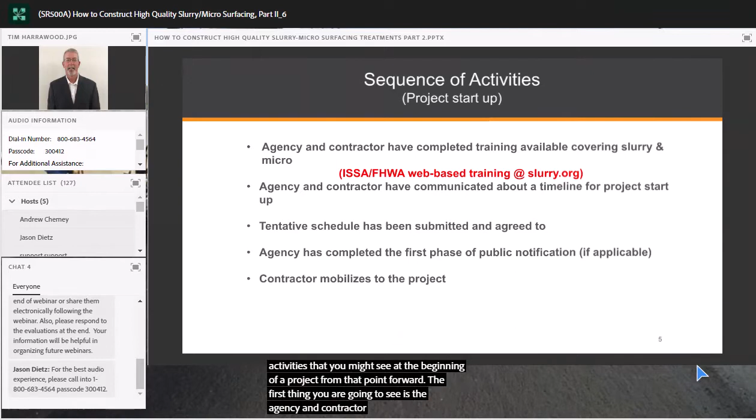The first thing you'll see is the agency and contractor completing available training covering slurry seal and microsurfacing. I put the link to where you can find that web-based training. As far as slurry and micro goes, there's a little over 6 hours worth of training offered free from FHWA and ISSA.

It's great information for just-in-time training, and it's really designed to help those with limited familiarity with the treatments become familiar with them before they have to perform oversight, or from the contracting side before they have to place the treatment themselves.

The agency and the contractor have communicated about a timeline for the project startup and talked about schedules. Those schedules have been submitted and agreed to, which means the agency has completed or put forth some effort to complete the first phase of public notification, if applicable.

We talked about that extensively in part one. It's great to have a three-pronged approach to notifying those who are going to be affected by this project. The more informed the traveling public is, the better off everybody is as a direct result.

After that, the contractor mobilizes to the project. What do we do next? The contractor sets up the staging areas, screening plants, emulsion tanks, and all the auxiliary equipment, and does general organization.

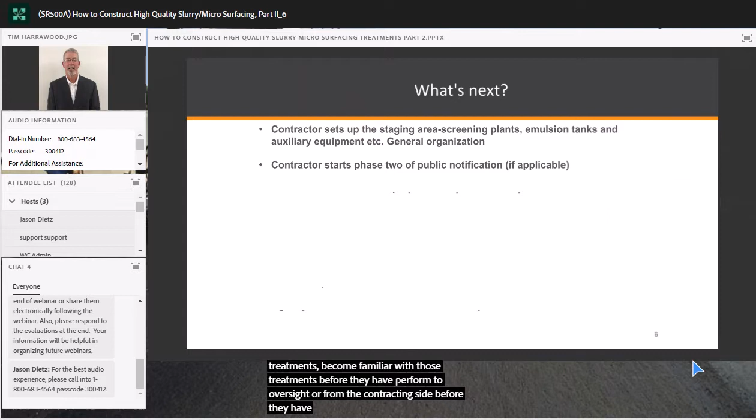While they're doing that, they'll have a crew out starting phase 2 of public notification, if applicable.

The contractor will start final surface preparation operations on the pavement to be treated. All the preliminary, or first phase, of surface preparation has already taken place - any patching, crack sealing, curb repairs, that's well behind us, and now we're just doing final sweeping, cleaning, maybe a little herbicide removal, things of that nature.

Then one of the most important things the contractor is going to do prior to starting the job is calibrate the application equipment in the presence of the agency representative. It's extremely important that the agency participate in the oversight of this calibration.

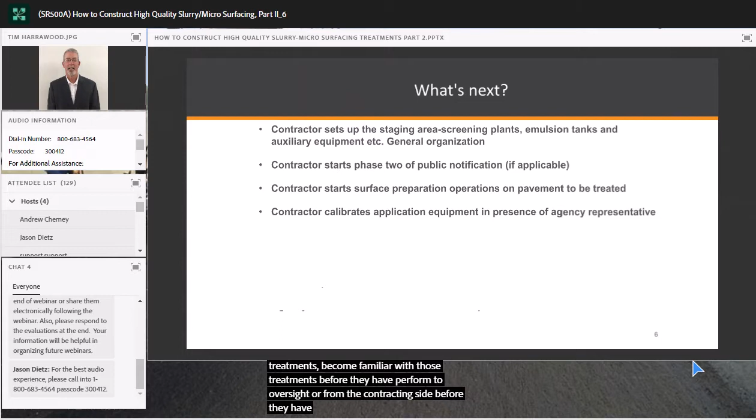Not only does it give them some familiarity with the equipment and how the component materials are blended together in the necessary proportions, it just lets them know how the equipment works. It's not something they typically see, and in about 2 hours watching a calibration, they can learn an enormous amount of information that will make them more comfortable with the operation.

Upon completion of the calibration, the contractor sets up the machine to produce a mix that matches the job mix formula, which we'll talk about here in just a minute.

The contractor then performs a test strip, which should be part of the project and in similar project conditions. We'll talk more about that as we get farther into the presentation. Then the agency and contractor evaluate that test strip after it's put into place. If acceptable, the contractor proceeds with treatment installation and major project production.

We talked about calibration and how important it is, and I really cannot emphasize it enough. If we've taken all the necessary steps to evaluate all the component materials individually and when mixed in a lab, putting them through all the rigors of performance testing to determine the job mix formula - the proportions needed to provide the best performance possible - if we do not produce a mix that's a mirror image of that job mix formula out in the field, then we leave ourselves a little vulnerable.

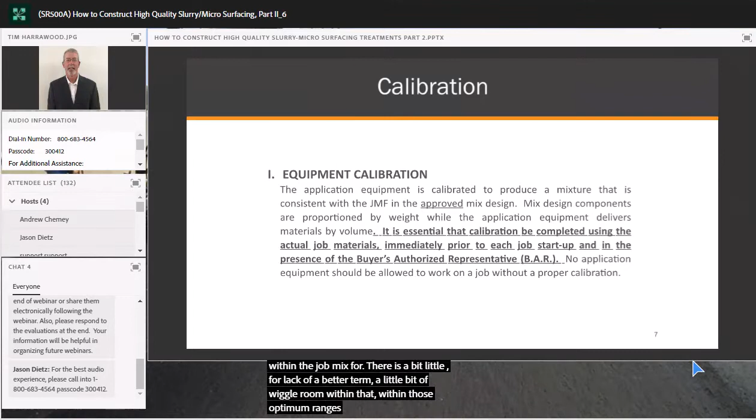We don't want to really be doing any stunt paving or making harsh decisions. We want to stay within that job mix formula. And there's a little bit of wiggle room within those optimum ranges, depending upon the actual project that you're working on.

But it's important that the agency get involved with the oversight of this calibration process. I've seen many times where agencies sit across the stockpile and say, yeah, the contractor's calibrating. Well, they just don't gain as much information as they could potentially be gaining if they were over there watching the weights and seeing how the materials come through the machine. So please get involved. Contractors typically welcome that oversight. It will familiarize you with the equipment itself, and it will help substantiate that the contractor is going to be producing a mix outlined in the approved mix design.

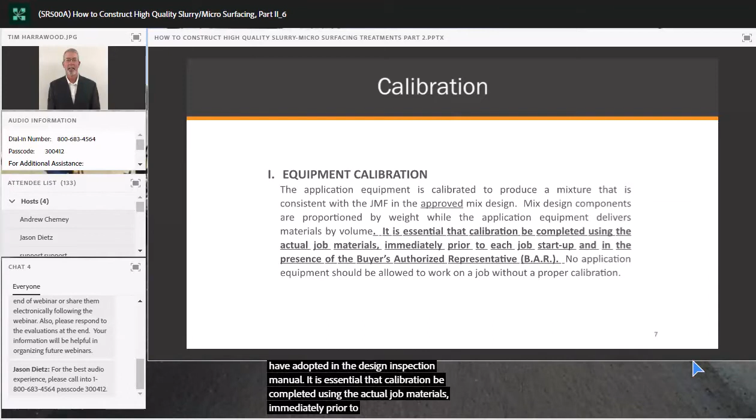Now, the statement on this slide has bold, underlined letters, which is a more recent change ISSA has adopted in that design and inspection manual. It says it is essential that calibration be completed using the actual job materials immediately prior to each job startup, and in the presence of the buyer's authorized representative.

In years past, ISSA kind of recommended or condoned the transfer of calibrations from job to job, and some specifications even allowed calibrations done in the same calendar year to be transferred. Some were 6 months. It's not a terribly lengthy process, and ISSA feels, as do I, that calibrating more often is better than calibrating less often.

Doing it in front of every agency you work for gives them the opportunity to gain familiarity with the way these treatments and components come together. It gives everybody a nice feeling going into the actual project that things are as they should be, rather than speculating off of an old calibration that has been submitted.

The documentation shall include an individual calibration of each material at various settings, which can be related to the machine's metering devices. Any equipment replacement affecting material proportioning requires that the machine be recalibrated. Some examples: if you have an emulsion pump go out, or a conveyor belt lock up, or the belting tears and you have to replace it, or the skirt board rubber on the conveyor — that may be a good reason to go back in and recalibrate that particular component material.

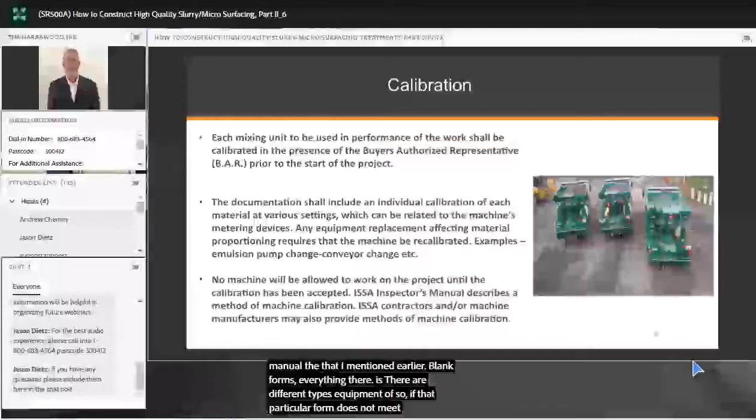So no machine will be allowed to work on the project until the calibration has been accepted. The ISSA Design Inspector's Manual describes a method of machine calibration, found in the appendices, with blank forms — everything is there. There are different types of equipment, so if that particular form doesn't meet the type of equipment being used on your project, you can always go back to the equipment manufacturer for their recommended calibration procedures and necessary forms.

In the theory of calibration, you have to know that the mixed components are based on the weight of the dry aggregate. Everything is based on that — application rates, proportioning of the mix, the whole ball of wax. So corrections for moisture in the aggregate are necessary. Setting the application equipment feed rates of emulsified asphalt, aggregate, mineral filler, water, and additives is critical to the success of the application of the treatment itself.

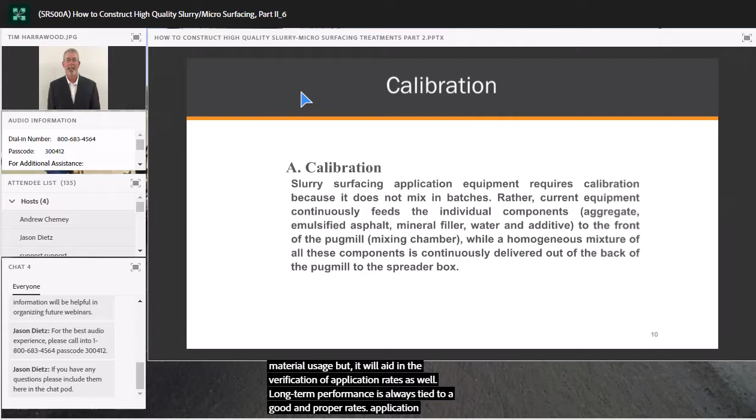The component material output factors identified during the calibration process will not only assist the contractor and agency in quantifying daily material usage, but will aid in verifying application rates as well. Long-term performance is always tied to a good and proper application rate. Okay, slurry surfacing equipment does not mix materials in batches.

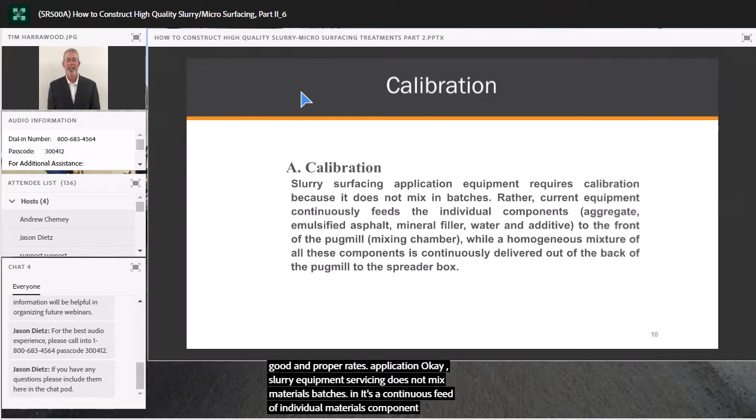It's a continuous feed of individual component materials, which again are aggregate, emulsified asphalt, mineral filler, water, and additives to the front of the pug mill, which is the mixing chamber. After being mixed in the chamber, it releases a homogeneous mixture of all these components in a continuous fashion, delivered to the back of the pug mill and into the spreader box.

Here you see a schematic of a slurry and microsurfacing machine. You can see the aggregate hopper right here, the aggregate gate - we'll talk about it in detail in just a minute - a mineral filler, and the induction of water right here.

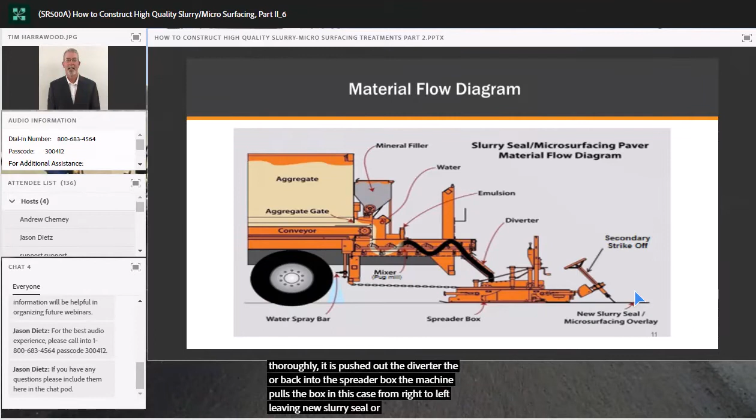As the conveyor turns, the aggregate goes through the gate. The Portland cement or mineral filler is dropped on top of that conveyor of aggregate. As it drops into the mixture, it's pre-wetted, then mixed thoroughly before being introduced to the emulsified asphalt about a third of the way into the mixer. Again, everything's mixed thoroughly, then pushed out the diverter on the back end into the spreader box. The machine pulls the box, in this case from right to left, leaving a new slurry seal or microsurfacing overlay behind the equipment. That's kind of a Reader's Digest version of how that equipment works.

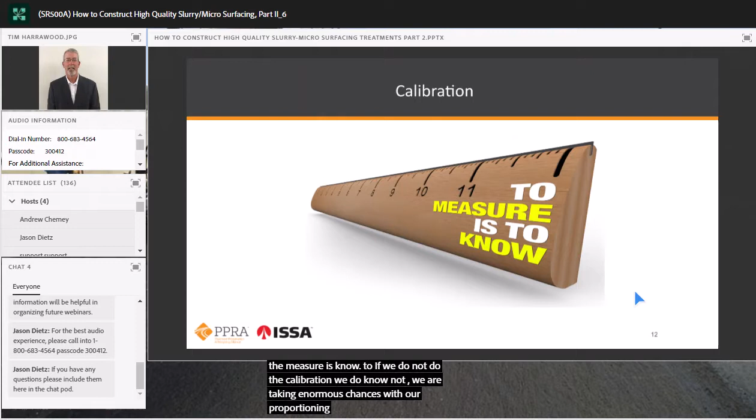Now, ultimately speaking, to measure is to know. If we don't do the calibration, we don't know. We're taking enormous chances with our proportioning, and in doing so, we're leaving ourselves vulnerable for potential failure or non-performance.

So let's talk about some of the items that are necessary for calibration. First of all, you need a copy of the approved mix design. You need calibration forms, and again, these are available in the design and inspector's manual and/or from the equipment manufacturer themselves. The contractor typically has those pretty handy. If an agency wants them, they're pretty easy to get to.

You need the component materials on the job, which is the aggregate, the emulsion, and the mineral filler. We need to know what the moisture content of that aggregate is. More than one time in my career, I've run into situations where you need to find out who's actually responsible for that - is the DOT responsible for coming up with that moisture content, or is the contractor responsible for doing that? Either way, it is important that we have an accurate moisture content going into this.

I tend to like agencies to do that so they are comfortable with that factor, rather than letting the contractor do it - maybe not that they would be unscrupulous, but maybe not cook the aggregate down far enough to get all the moisture out of it, and come up with something that may not be as accurate as a test done in the little local district or regional lab that may be close by. So it's important to know who's going to do that, but either way, it has to be done.

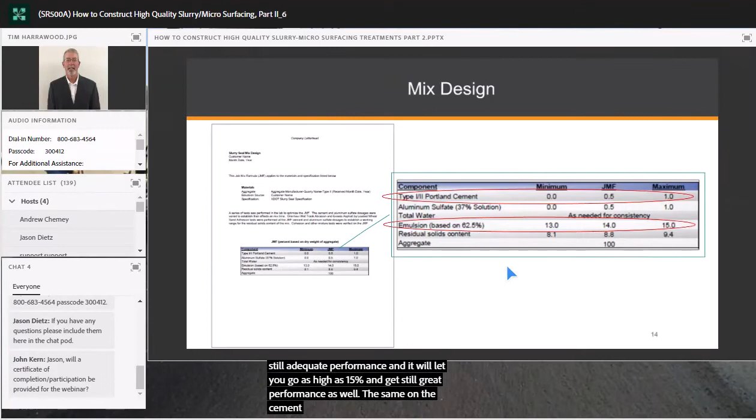We talked about the leeway or the wiggle room that mix designs sometimes have in them. You'll see that it will allow you to go down to 13% emulsion and still get adequate performance, and it will let you go as high as 15% and still get great performance as well. Same on the cement—I've never seen one actually go down to 0%, but a quarter I've seen before, and it does allow you to go up to 1% from a half. So it gives you a little bit of room to optimize those proportions during the test strip and on the project.

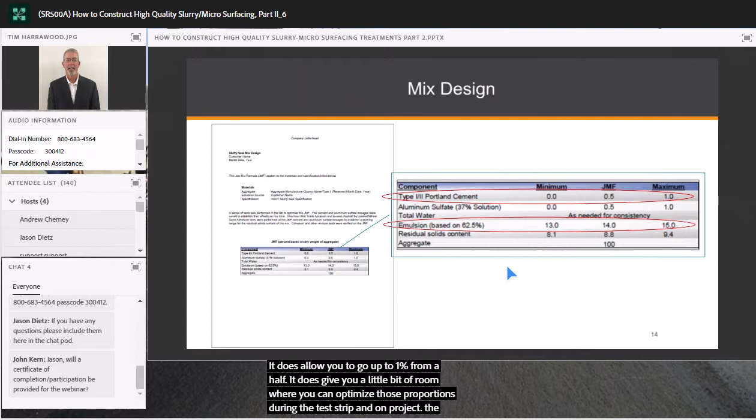So this is what they're going to look at when they start their calibration, to know what the desired percentages are on the mix that they're going to be producing.

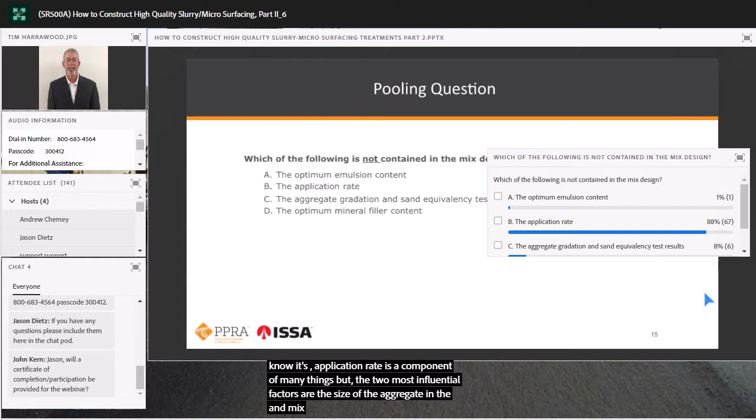Well, it looks like everybody's knocking it out of the park here, so that's very good. It's the application rate. Application rate is a component of many things, but the two most influential factors are the size of the aggregate in the mix and the surface condition of the pavement you're going over. There are other things that affect that, but those are the two biggest things, and that's something that is generally not spelled out in the mix design.

So, moving forward. Okay, I think I might have got too far here. Well, I'm not for sure. I'm not locked up, Jason.

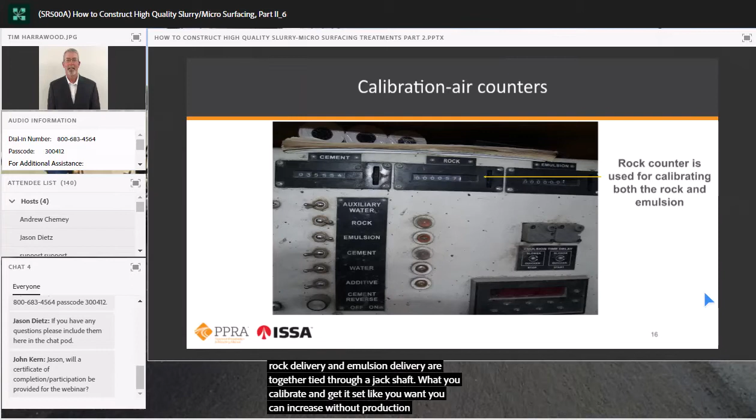Yes, we try to get these, okay—the calibration air counters. On a lot of equipment today, you can either have air counters or electronic style counters, but it's important to know that for this calibration procedure we're going to walk through today, we use the rock counter for both calibrating the rock and the emulsion. And in most cases, the rock delivery and emulsion delivery are tied together through a jack shaft. So once you calibrate them and get them set like you want, you can increase production without altering your actual percentages of each component material.

Okay, another thing that we've seen probably for the last decade or more on equipment is the computer monitors. We prefer to have both on our equipment—if one goes out, you've got a fail-safe that'll help you out.

During the calibration process, you can actually enter the weights into this monitor, and it will tell you your gate setting and how many pounds per count, and it will factor the moisture out of it, and it will give you real-time application rates, provided that you put the actual box width, the width of the lane you're laying, into the monitor itself. It's a valuable tool that really is essential to helping our guys dial in on those desired application rates. And again, it's nice to have a backup.

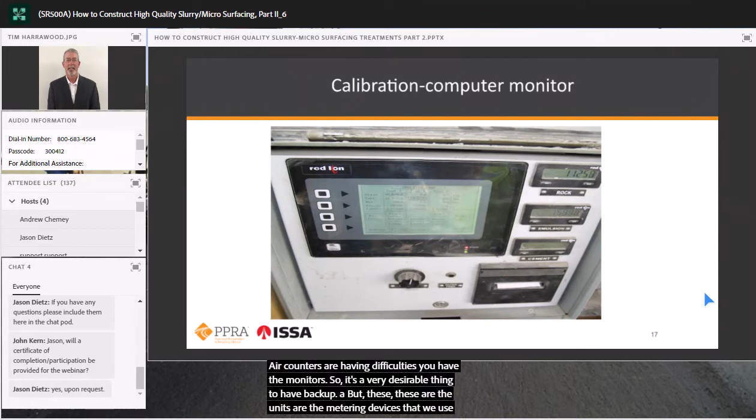If the monitor goes out for some reason, you have the air counters. If the air counters are having difficulties, you have the monitor. So it's a very desirable thing to have a backup. But these are the units, or the metering devices, that we use and put our factors into after we've calibrated.

Let's talk about emulsion calibration. It can vary depending upon the type of emulsion pump that you use. There are really a couple different kinds: a constant displacement pump, or a variable displacement pump. This is not all that's available, but it's probably more typical on the majority of equipment that's out there applying these treatments right now.

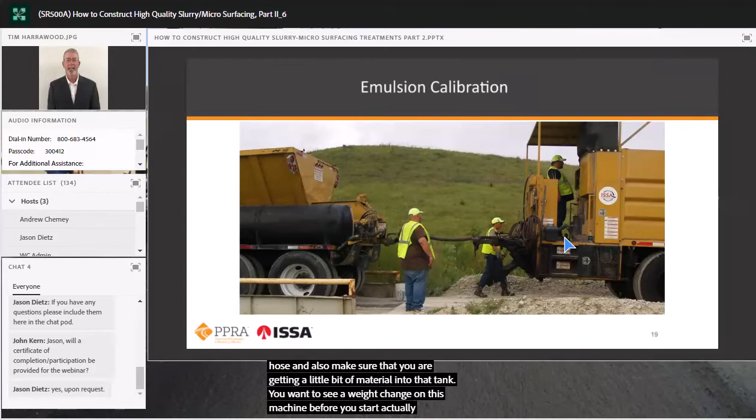You can see here just an example of what this process of calibrating emulsion may look like. You've got the machine on the right-hand side of the picture, and an actual nurse truck with about a 600-gallon tank over on the other side, sitting on a platform scale. When they start the emulsion calibration, the first thing they do is pump enough material to fill the hose, and also make sure you're getting a little bit of material into that tank. You want to see a weight change on this machine before you actually start your 3 test runs. So again, this is just what it looks like.

We're going to run 3 different samples or test runs on the emulsion pump and do an average of it. This particular nurse truck's empty weight was 56,940 pounds. We started the machine pumping asphalt and ran 425 counts on that air counter through that machine and through that hose, and our ending weight of that truck was 58,640 pounds. So totaling 1,700 pounds of emulsion was pumped into that nurse truck, with 425 counts on that counter. If you divide the 1,700 by the 425, you come up with 4 pounds of emulsion per revolution count on that counter.

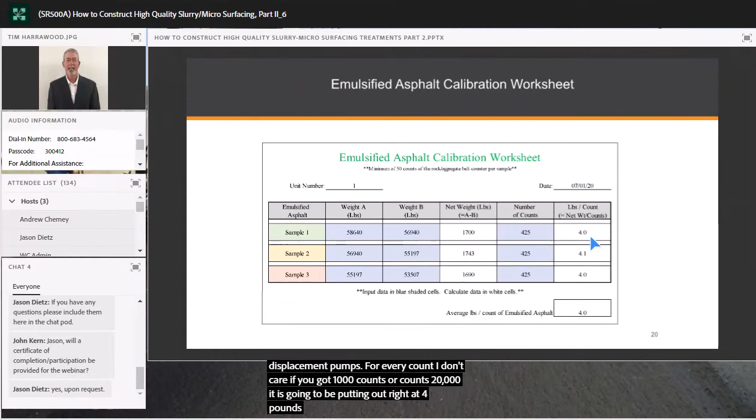That's very important. We do that 3 times, and you can see we've done it 3 times here: 4.0, 4.1, 4.0. That averages out to a 4.0, they rounded that down. But that's as accurate as you can get, and that's what I'm talking about when I talk about constant displacement pumps. For every count, I don't care if you've got 1,000 counts or 20,000 counts, it's going to be putting out right at 4 pounds per count. So you can quantify the material usage, and you can use it also to verify application rates and things of that nature out in the field.

Let's take a look at what the mineral filler calibration looks like. We started with a 1-pound bucket and ran 20 counts on the cement feeder, or the cement counter. Our total weight at the end was 6 pounds, which means we had a net weight of 5 pounds of Portland cement ran through the machine. We take the 5 pounds divided by 20 counts, and we're looking at 0.25 pounds of Portland cement per count on the cement feeder.

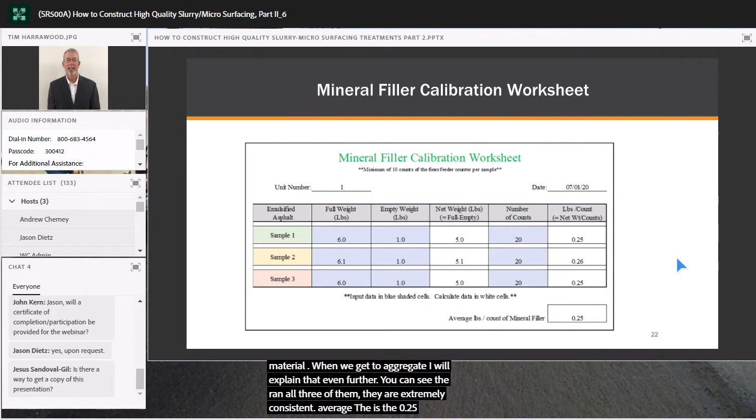You've got to do 3 runs on every calibration component material, and when we get to aggregate, I'll explain that even further. But you can see they ran all 3 of them. They're extremely consistent, and the average is 0.25 overall pounds per count for the mineral filler.

Now, when it comes to the aggregate gate, and this is extremely important, with a constant displacement pump, the only way that we can change our emulsion percentage is by raising or lowering this aggregate gate. The lower the gate, the higher the emulsion percentage. The higher the gate, the lower the percentage of emulsion.

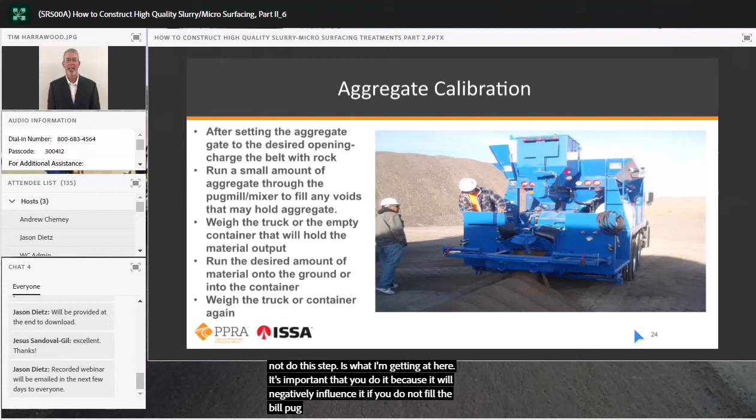Again, you want to weigh the truck or the empty container that will hold the material output. You want to run the desired amount of material onto the ground or into the container, and then reweigh everything. With aggregate, we always do 3 gate settings - in this example, a 3-inch, a 4-inch, and a 5-inch gate setting. At each gate setting, we run 3 samples, so we can get a good average that we're very comfortable with when we plot our chart.

The numbers are a little small, but what you see here is they ran 50 counts out, about 1,300 pounds each time, and factored in 5% moisture. They ran 3 runs and got 26.0, 26.2, and 26.4, which averaged out to 26.2. You divide that by 1.05, the decimal equivalent of your moisture content at 5%, and it tells you that you get 25 pounds of dry aggregate per count.

That's important, so you mark that down, and at that point you switch your gate to 4 inches. You recharge the belt again to make sure you've got a full 4-inch thickness of aggregate out to the end of your belt, and run 3 rounds of samples again. We'll just go straight to the average - I'm having a hard time reading it, it's pretty small - I think it's about 38 divided by 1.05, which gives you 36.2 pounds of dry rock per count on average.

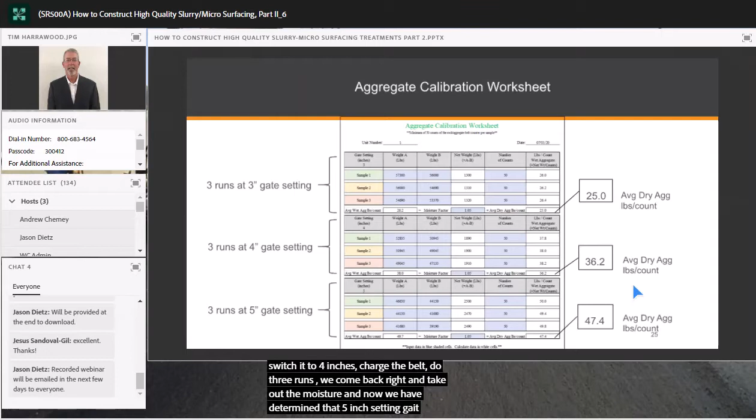We go to 5-inch, switch it to 5 inches, charge the belt, do 3 runs. We come right back and factor out the moisture, and now we've determined that at the 5-inch gate setting, we're averaging 47.4 pounds of dry aggregate per count. That's great information - those are the factors we're looking for. What do we do with them?

Here's where we plot our chart or our graph. We've got the average dry aggregate pounds per count runs up the left side, and gate setting in inches here. Remember, the gate is the only way we influence the proportioning of the materials. So we were 25 pounds of dry aggregate at 3 inches.

We come up the left side until we hit 25, come across, and we make our mark. We do the same thing at 4 inches at 36.2. We make our mark, and at 47.4 we make our mark.

If they don't make a good straight line like this, then something's not exactly right, and you may need to go back and revisit one of those gate settings to make sure you can get a good straight line, as seen in this example. This shows that incrementally as you raise the gate up, things are doing just like they're supposed to. The machine's performing extremely well in this example.

Now we're going to do a summary of our calibration, and this is a 2-phase deal, because you've got to mark down your emulsion pounds per count, which is 4, if you'll remember from our emulsion calibration. Then we need to look at our certificate of analysis to find out our residual asphalt content. You can see here we got a 64.5 residual AC content in our emulsion, and from the mix design it shows that our residual asphalt content should be about a 7.7 residue with that type of emulsion being delivered.

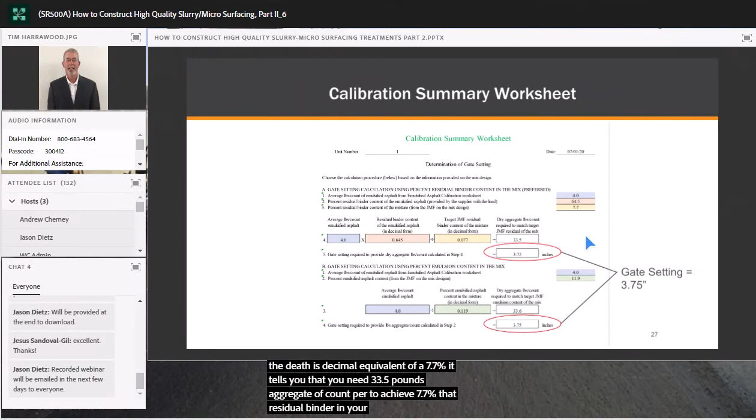Okay, and I'll show you here in just a minute when we go to the next graph, that's going to put us at a 3.75 inch gate setting.

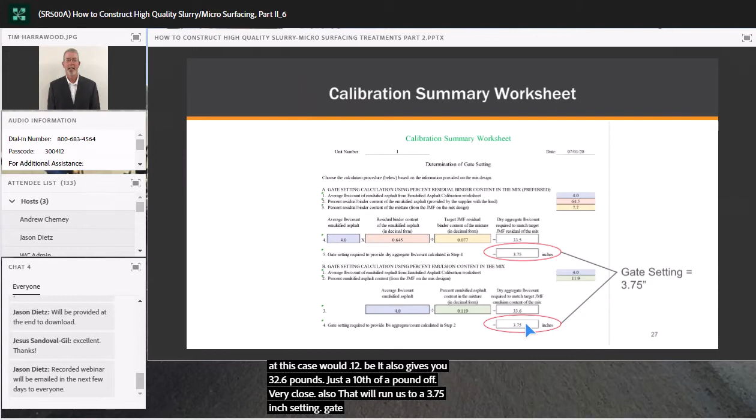You can do the same thing with emulsion, and some people do that. You've got 4 pounds a count and basically 12%. You divide the 4 by 0.12, and it also gives you 33.6 pounds. So just a tenth of a pound off, but very close, and that also runs us to a 3.75 inch gate setting. So the numbers are basically identical — that's what we want in this process. Two different ways to get to the same answer is what I'm trying to illustrate.

So we go back to our aggregate graph, and this is how we determine our gate setting. Remember, we needed 33.5 pounds of dry rock per count to achieve the 7.7 residue, or the 12% AE, which is asphalt emulsion. So we come up our pounds of aggregate per count, all the way up until we hit 33.5. We come across until we hit the line, then drop straight back down to what our gate setting is, and it tells us we're looking at a 3.75 inch gate setting. Pretty simple way to determine your gate setting.

And I forgot I animated those things.

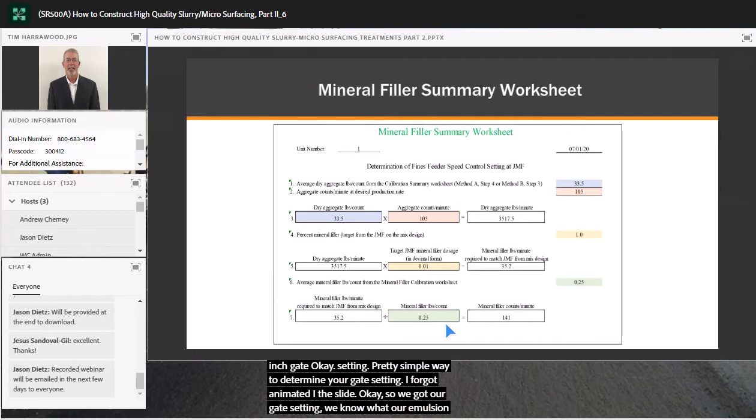Okay, so we've got our gate setting. We know what our emulsion's doing. Now we've got to go back and do a summary worksheet on our mineral filler to make sure that we're going to achieve that 1% cement that we're looking for in this design.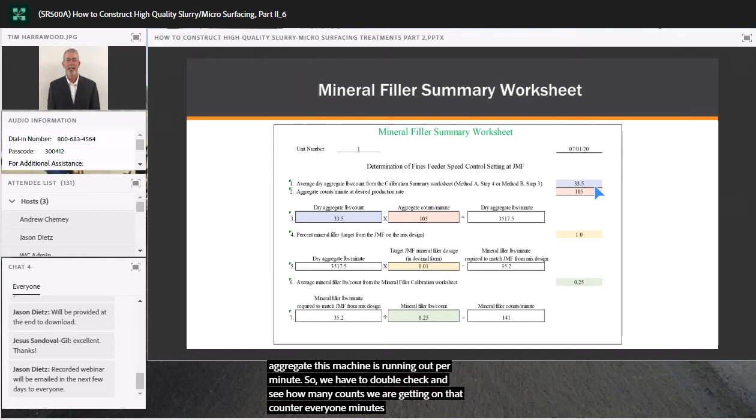To do that, we've got to know what the output of the machine is. We know because we just finished and set our gate that we're getting 33.5 pounds of aggregate per count on those metering devices. For every 1 count on the metering devices, you get 33.5 pounds. We need to know how many pounds of aggregate this machine is running out per minute, so we have to double check how many counts we're getting on that counter every minute to determine our output. So we've timed it, and we've got 105 counts in a minute.

So we're going to take that 33.5 pounds of aggregate per count and multiply it by the 105 counts per minute, and it tells us that our aggregate output per minute of dry aggregate is 3,517.5 pounds. So that's a lot in a minute — we're mixing a lot as we're going down the road. The percent of mineral filler desired from the job mix formula is 1%, so we're going to go right back to the pounds of material per minute, which is 3,517.5.

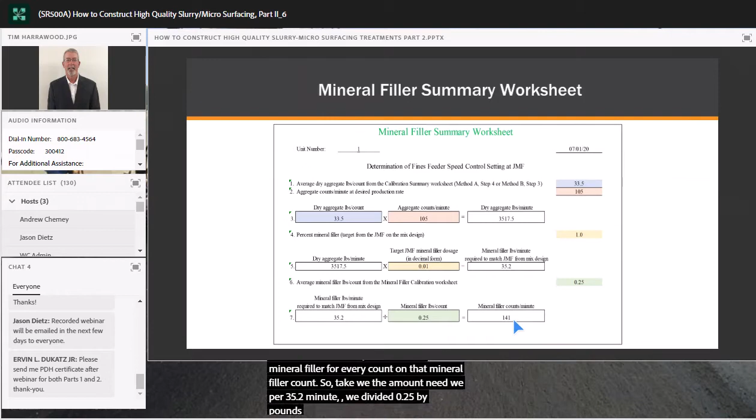We're going to multiply it times 0.01, the decimal equivalent of the percentage we need, which is 1%. That tells us we need 35.2 pounds of mineral filler every minute to achieve that 1% cement. So we go back to our mineral filler worksheet, and we know we had 0.25 pounds of mineral filler for every count on that mineral filler counter. So we take the amount we need per minute, 35.2, divide it by 0.25 pounds per count, and it tells us we need 141 counts per minute to achieve 1% cement.

These are the important numbers again. What I've typically done in the past, just to make it a little quicker so you don't have to wait so long, is take that 141 counts per minute and divide it by 4, which tells me how many counts I need every 15 seconds. So you can set your machine, then go back and double check it, run it for a minute, and make sure you're where you need to be.

So, another polling question.

Calibrating the application equipment and monitoring proper feed rates of the material components of the mix are necessary to...

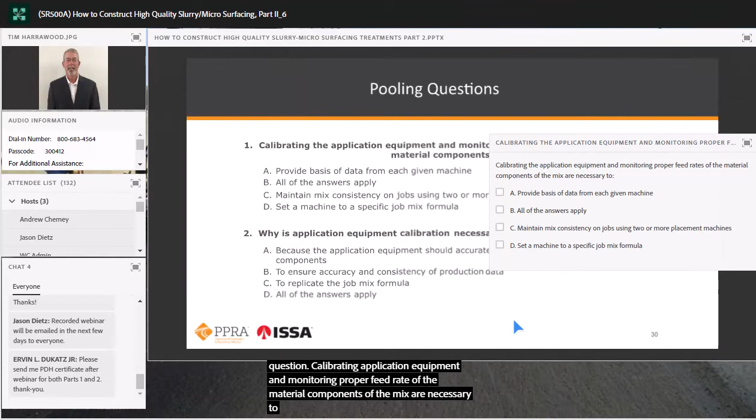Oh man, 100%. You guys are strong. Great. Okay. Still doing very good, everybody's on board there.

And question number 2.

All right, good deal. All right, Jason, let's move along. Looks like everybody's got it figured out.

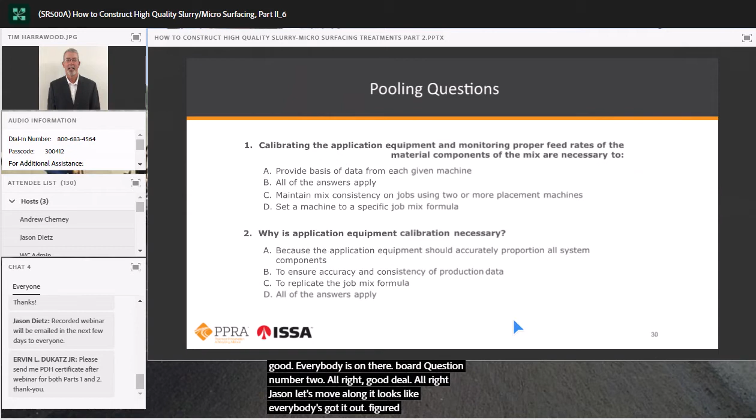Now that we've successfully calibrated, the first thing the contractor is going to do, with the machine set up the way he needs it, is back up over to an area in the stockpile and make some trial mixes, making sure he's got his aggregate, water set properly, and additive if necessary. Then he's going to get ready and go out and do a test strip, which in our opinion should be performed on the actual project site.

You can see on the left, a crew performing the test strip there. Everything's going great. And Jason, if you could play this video, it should give everybody an idea of what a test strip can and should look like.

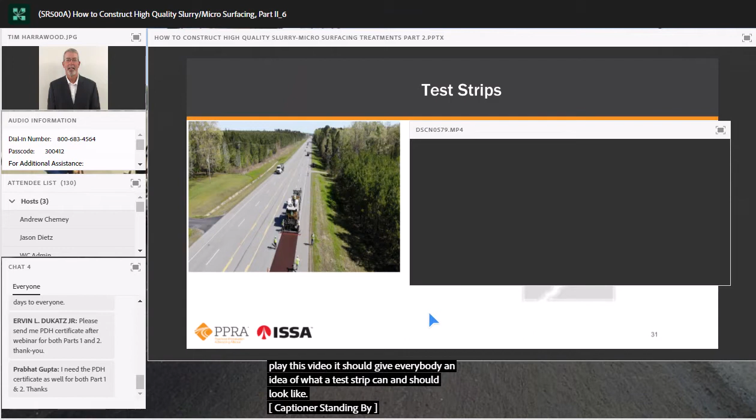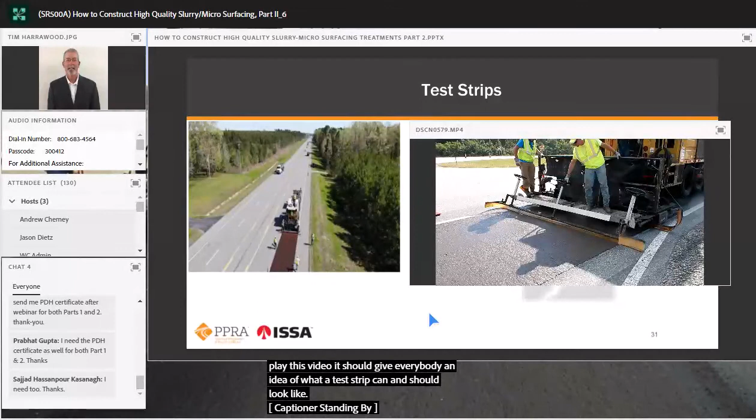Okay, we don't have any sound here, but you can see you've got great uniform surface texture. Everything looks good, machine's running great, and everything's alignment is perfect. Good, consistent application. We'll talk about how we're going to evaluate this test strip in just a second. But just an idea of what a test strip should look like.

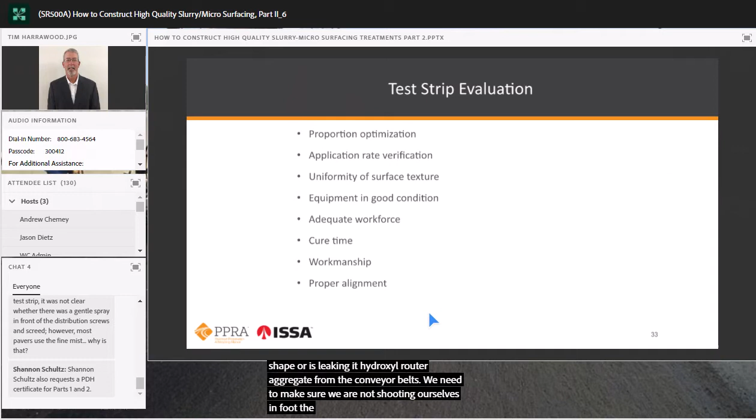Is our application rate proper? Do we have it where we want it, or do we need to make an adjustment? Do we have good, uniform surface textures? Is the equipment in good shape, or is it leaking hydraulic fluid or aggregate from the conveyor belts? We want to make sure we're not shooting ourselves in the foot by having equipment that's not in the best condition out there. Do we have an adequate workforce capable of handling all the processes that need to be attended to while doing the actual work? Is the cure time good?

Is the product setting up like we want it to? Is it breaking and curing in a timely fashion? Is the workmanship acceptable? If they had to do a little handwork, what's it look like? A lot of people don't put a lot of faith in the alignment, but you've got to pull straight lines. We're very capable of doing so, and it's easily done if you take the proper steps. Those are the things you want to look for when evaluating the test strip.

If the test strip doesn't go so well and it's not accepted, you got to go back to the drawing board and identify the areas where improvement is necessary. Where did they have the incorrect rubber in the box and it wasn't producing the uniformity that you wanted? Could they not get the application rate because they had too stiff of a rubber in there? Were the edge lines wavy and not straight? That's the time to identify those areas and make the steps to improve them.

Keep making adjustments and perform the test strip again, and repeat as necessary until successful. Doesn't happen a lot, but that's the whole idea behind the test strip: to work out any potential bugs or kinks that you may have prior to getting out and going into full-scale production. So that's what we got to do if the test strip's not accepted.

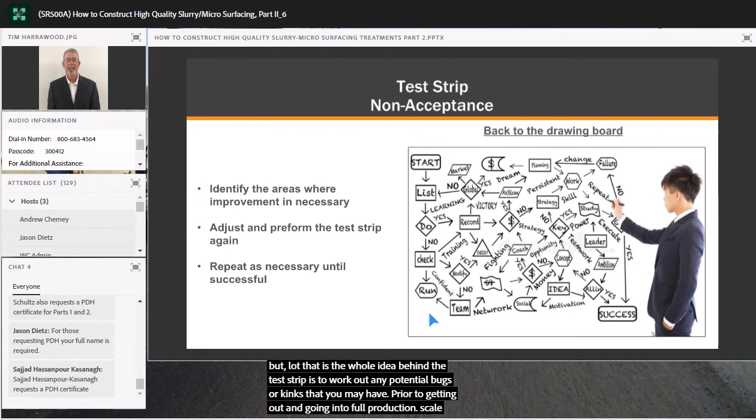I think I may have skipped one there.

Okay, another polling question. Break and cure times are the only concerns you should consider when evaluating the test strip. Everybody's got that one. Next question.

If the work on the project is to be performed during daylight hours, the test strip should be performed during nighttime hours. These questions are far too easy. All right, let's move on to the next one.

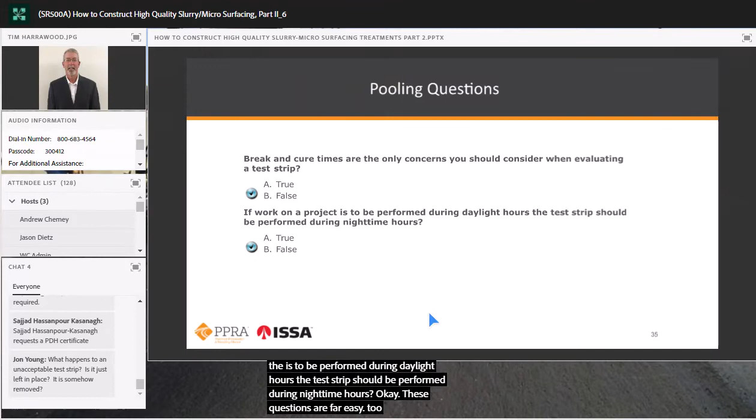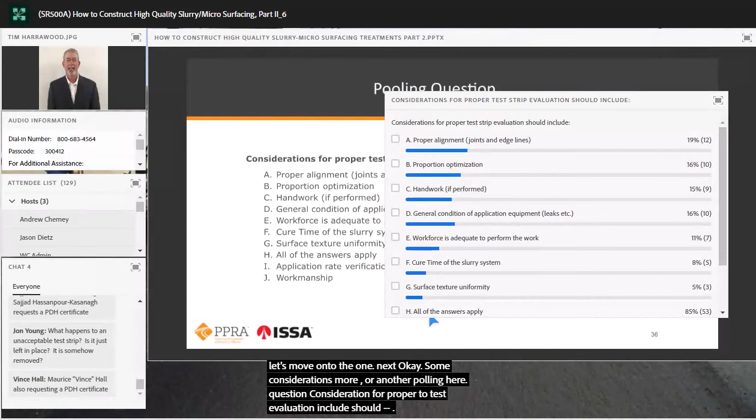Okay, some more considerations, another polling question here. Consideration for proper test strip evaluation should include... and the answer to that is going to be all of the answers apply.

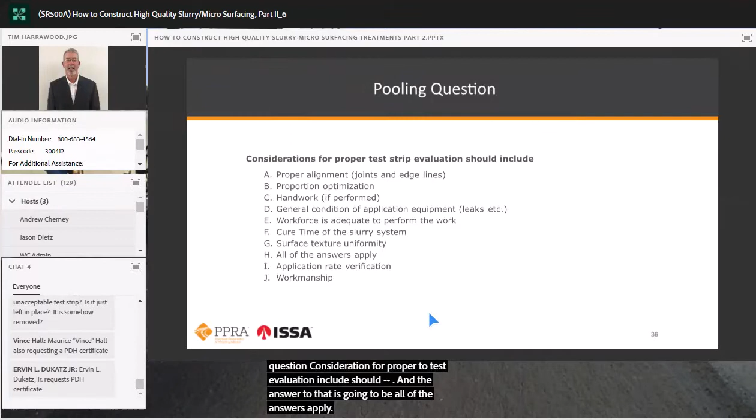Okay, let's talk about yield checks. They're going to be very important, not only during your test strip evaluation, but during the project itself. You need to do several of these checks in a random nature throughout the day, and it's a pretty simple process. We have all the factors from our calibration, and for instance, if we take a 1,000-foot test strip area at 12 foot wide divided by 9, tells us we've got 1,333 square yards.

We start our counters, our metering devices, off at 0. We run the 1,000-foot test strip, and at the end we have 796 counts on the aggregate counter. We'll come right back up here and say 796 times the 33.5 pounds of dry aggregate per count that we determined during calibration. It tells us that we ran out 26,666 pounds of dry aggregate.

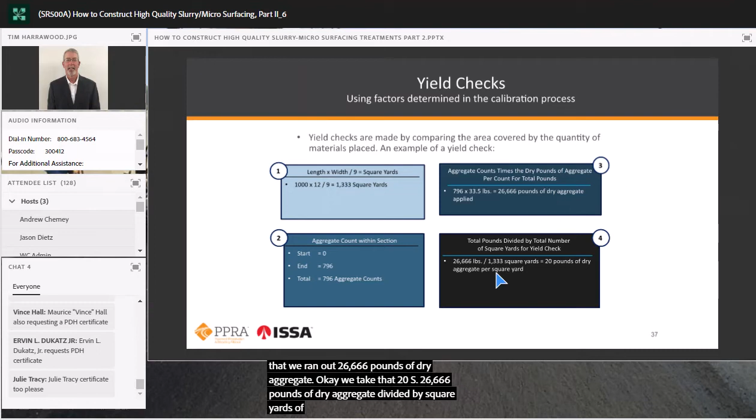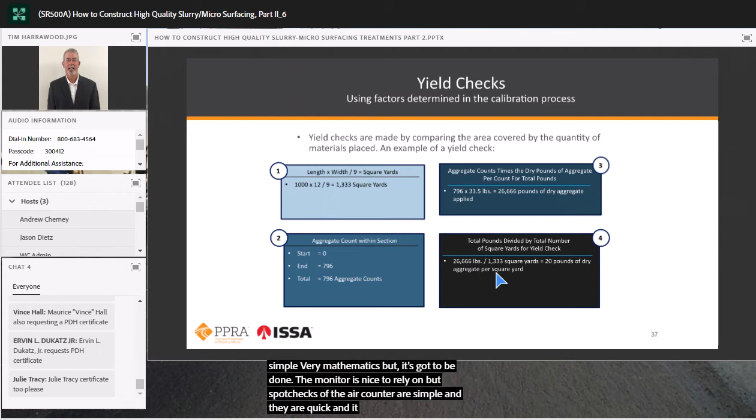We take that 26,666 pounds of dry aggregate, divide it by the square yards of 1,333, and it tells us we've got 20 pounds of dry aggregate per square yard. Very simple mathematics, but it's got to be done. The monitor's nice to rely on, but spot checks off the aggregate counter are simple, they're quick, and they just verify that the contractor's placing the amount of material specified in the job.

Okay, so if the test strip's accepted, what do we do? We go to work, is exactly what we do. Typically speaking, test strip placement, evaluation, and acceptance generally take place on the same day and within a short period of time. A lot of times we find that an hour is about all you need if the material's curing properly, everything looks good, equipment's working great. The agency can tell whether the contractor is in a condition to go to work or not. So that's typically the way we see it, and if the test strip goes well, then go immediately to work.

Okay, we got a little bit of time. We'll try to go through this troubleshooting pretty quick. That was calibration and test strips. Extremely important. Prior to any job startup, you need to do them both.

Now, in the design and inspection manual, you see we've got several categories of troubleshooting listed in the index. In fact, we've almost got the entire alphabet covered. We obviously do not have time to cover all of those topics here, so I just cherry-picked a few. But before we start, the thing about troubleshooting, there are some steps to it. Step one, you just need to identify the problem.

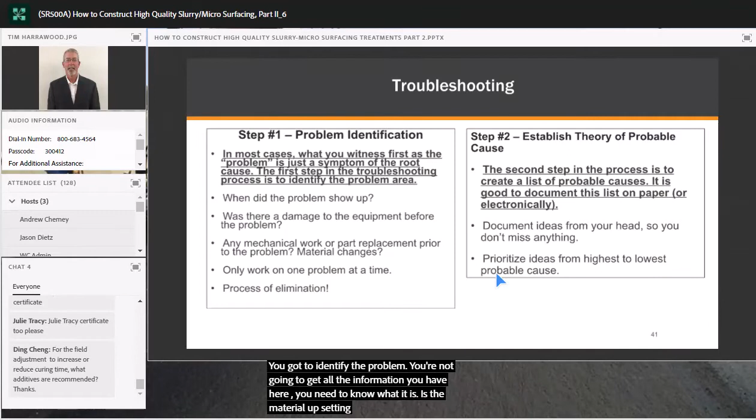We're not going to get into all the information I have here, but you just need to know what it is. Is material setting up too fast? Is it not curing? Is it not mixing properly? Establish what the product or problem is. Establish a theory of probable cause. What are the items that could be creating that issue?

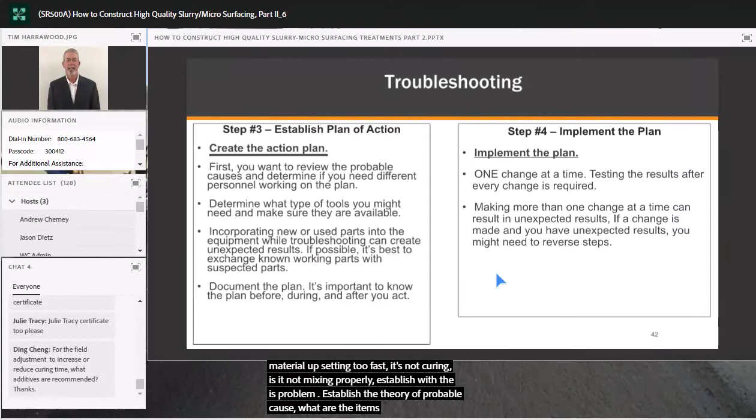You've got to create an action plan, how you propose to do a process of elimination to determine the cause of the problem. You need to implement that plan, and once you do, everybody assumes the problem has been solved. At the end, we need to document those findings so next time that situation happens, we know the process of elimination to verify that information. So those are your typical troubleshooting items, and it's very prudent to follow those six steps.

So here's one of the items I picked out of the manual, and it's about non-uniform color. The condition is when the finished surface may exhibit color variations. They may be discernible, or may not be discernible until the next day or more. They will usually disappear as the slurry surfacing or microsurfacing is exposed to traffic and elevated temperatures. And these issues are predominantly aesthetic or cosmetic and will not affect long-term performance.

If the color does not come back, there's a pretty good way to remedy this situation, and that's a fog seal — a very light fog seal on that pavement to give it good uniformity of color. But again, typically not a long-term performance issue.

But there's a couple of things that could cause it. It could be an equipment issue — it may not be accurately calibrated, or there could be a mechanical issue affecting the proportions. We need to go back and verify that our calibration is still good and all of those component material delivery systems are in good working order. Once we've done that, if the machine's running great, there must be another cause. Could it be environmental conditions? Did we see rain or extremely cool temperatures prior to the material getting a full cure? Or was the humidity extremely high? We have to do process of elimination on troubleshooting, just like we do on just about everything.

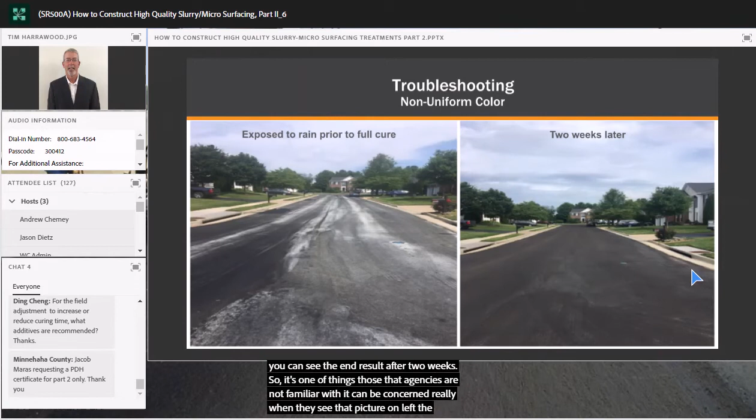Here's an example. On the left, you see a microsurfacing that was put down, and prior to full cure it received a little rain, and it just looks horrendous. You see a little bit of fines and things of that nature that are discolored. Doesn't look very acceptable. But with a little heat and a little traffic, you can see the end result after two weeks. So it's one of those things that agencies that aren't that familiar with it can be really concerned when they see that picture on the left. But if you can talk them into waiting just a little while and giving it several days of warm temperatures and traffic, what you see on the right is what you may get as an end result.

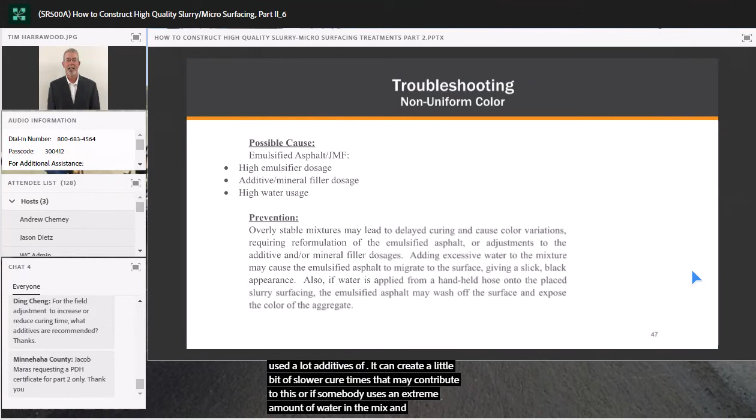So another potential cause of this is the emulsified asphalt. If it's got a high dosage of emulsifier, or if the contractor is using a lot of additive to get the material down, it can create slower cure times that may contribute to this. Or if somebody's using an extreme amount of water in their mix and floating some of these materials, that could have an effect on it as well. So those are the three things that could potentially create this non-uniform color.

Now, let's talk about premature breaking of the mix. If the mix is setting up coming out of the pug mill or in the spreader box before you can get it applied properly, there's a lot of things it could be. It could be inaccurate calibration again.

It could be incorrect loading of the mineral filler. It could be that the formulation for the emulsified asphalt has changed or is incorrect. It can be the use of non-potable water. Maybe you got a load of hot emulsion. Maybe you're not using a spreader box with augers, which we recommend on every job, slurry or micro. Maybe you need to put a little additive in it. Did the aggregate supplier send you freshly crushed material, which tends to be a little more reactive in that state rather than material that has had a while to weather and cure?

Changes in gradation or sand equivalency - we need to check those through your QA/QC program. And has the reactivity of the aggregate fines changed, or has it just gotten really hot overnight? If you're laying at 80 degrees one day and the next day it's 95 to 105, that could have a direct effect on the premature breaking of the material.

Of course, for prevention, we want to verify that calibration. We want to confirm the compliance of the materials, make sure that everything's still in spec. We want to make sure the emulsion's properly formulated, and that our water source is good. We want to maintain constant movement in the slurry box, back down to the augers I mentioned a minute ago. And we want to make sure the operator knows he can put some chemical additive in there to buy us a little more work time with that material so we can get it in place in a proper fashion. We also want to work closely with our aggregate suppliers to make sure they're sending us well-seasoned materials rather than stuff directly off the crusher belt.

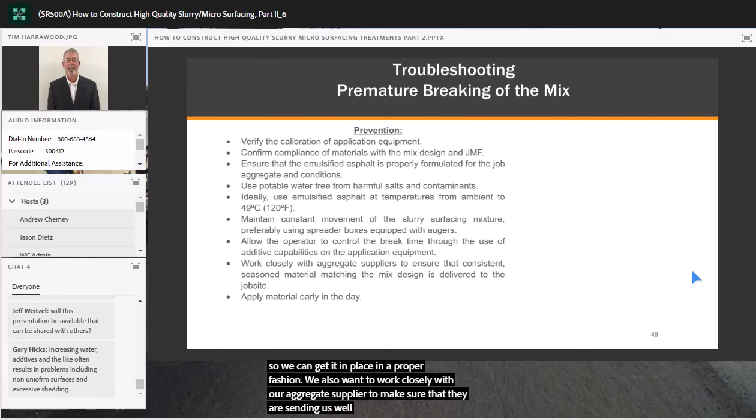And then if it's too hot in the middle of the day or the late part of the day, we want to try to get an earlier start at it and work a little earlier in the day.

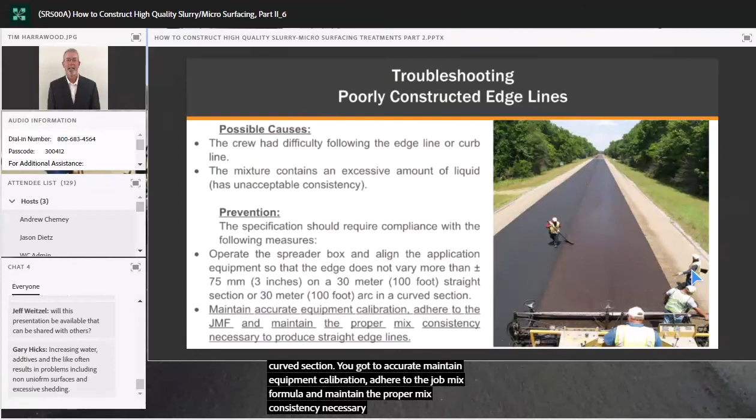Prevention: want to make sure everything's in compliance. We want to operate the spreader box and align the application equipment so the edge does not vary more than 3 inches on a 100-foot straight section or in a 100-foot arc or curved section. Just got to maintain accurate equipment calibration, adhere to the job mix formula, and maintain the proper mix consistency necessary to produce straight edge lines. It can be done - it's done every day. You just got to make sure that the contractor's getting it done.

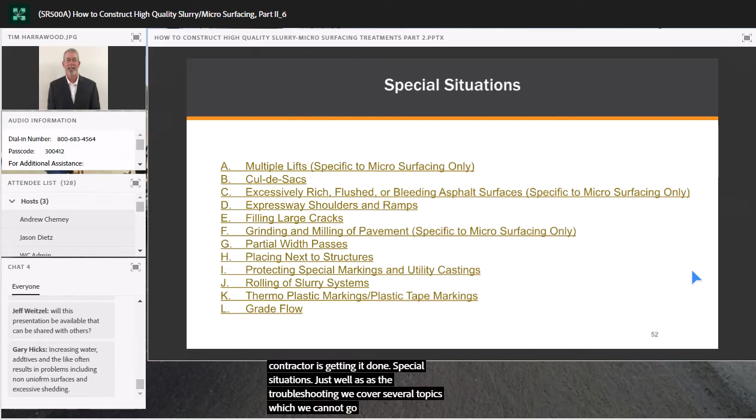Special situations, just as well as the troubleshooting - we cover several topics which we can't go into here. But if you'll get signed up and go get your electronic version of the inspector's manual, you can have all this stuff at your fingertips right on your computer.

Okay, cul-de-sacs. Of course, everybody knows what a cul-de-sac is, and we know that the equipment used to do slurry seal and microsurfacing is large and maybe not as nimble as smaller equipment may be, but they've always created problems. And when you get into cul-de-sacs, you've got to have a proper method to do it.

There's going to be some handwork. The handwork needs to be done properly, done in little pieces at a time. Don't bite off more than your handwork guys can chew. Make sure it's done right, because the last thing you want to do is finish it and have to come back and address that area again.

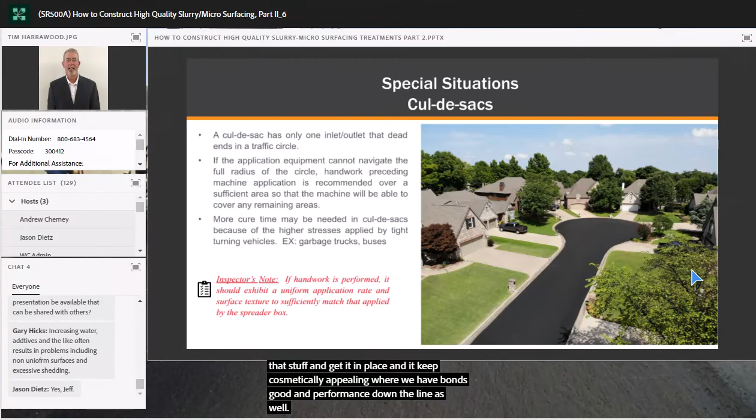We want to make sure that if we've got a bunch of cul-de-sacs on the schedule, we talk with our emulsion supplier and have a formula that gives us a little bit more time to handwork that stuff and get it into place, keeping it cosmetically appealing with good bonds and performance down the line as well. So you just have to be prepared - you got to know what kind of job you're going into. The example you see on the right-hand side here in that picture is just about as good a work as you can get.

Another special situation is protecting special markings and utility castings. We talked about this briefly, or at length, in part 1. Although masking special pavement markings was common practice in the past, it is now believed that the ridge created around the stencil creates a ponding problem that promotes pavement deterioration. And in the next slide, I think it is, I'll get more into that.

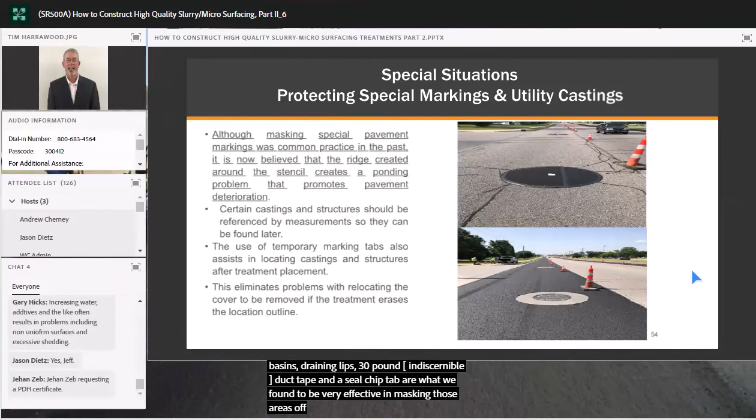As far as manholes, water valves, catch basins, and drain inlets, 30-pound roof felt, duct tape, and chip seal tabs are what we found to be very effective in masking those areas off. You can lay right over the top of them. Once the material's cured, you can expose that utility again, and everybody is happy.

So not really much value in doing this. Remove that thing, fill it up with high-performance cold mix, tamp it down, let it be under traffic for a little while, and then after the project's over, come back in and reinstall those treatments.

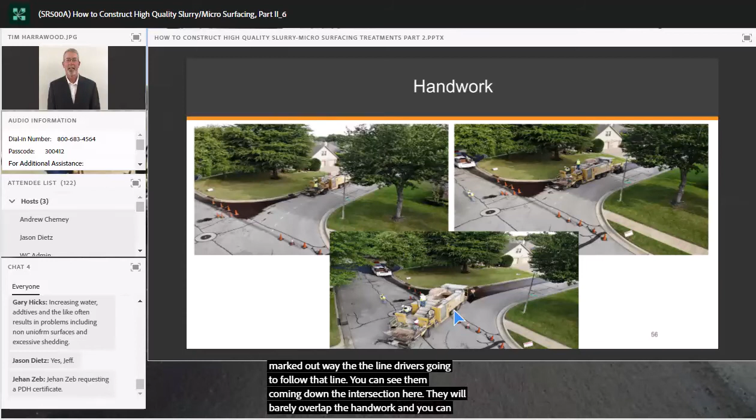So come in and do those prior to it. You can see the contractors went beyond the call of duty and marked out the way the line driver is going to follow that line. You can see them coming down into the intersection, barely overlapping the handwork they did, and coming out. It's just a fantastic way to do things, and generally produces a much more acceptable end product.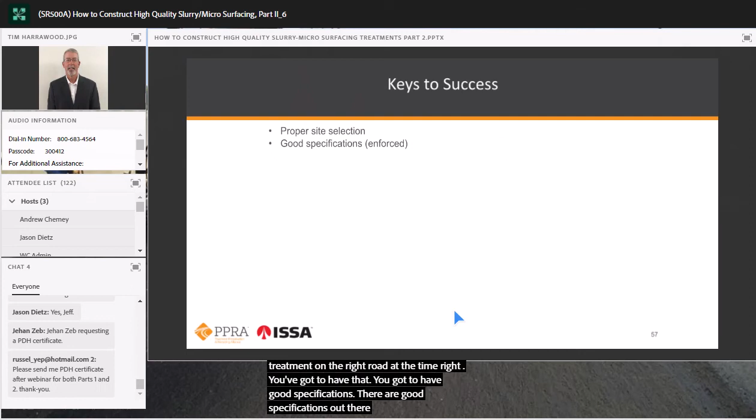You've got to have good specifications, which there are good specifications out there, but more importantly, those good specifications need to be enforced. That really goes back to a familiarity issue. We find a lot of agencies that are not familiar with these thin non-structural surface treatments. They hesitate to enforce things because they're not familiar, and that's not what we want. So continued education is a big deal. We've got to have good specs.

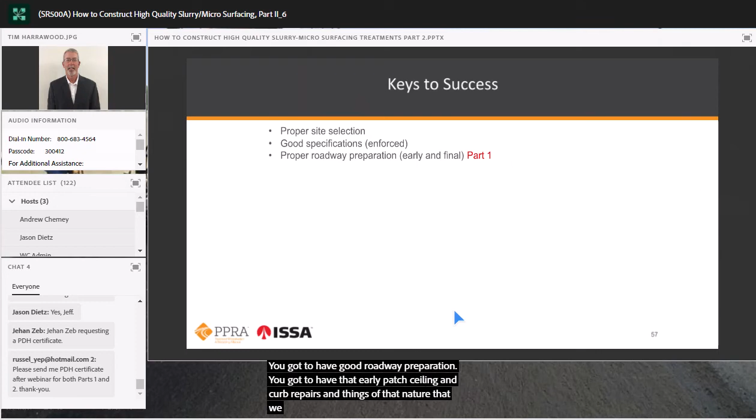You've got to have good roadway preparation, with that early patching, crack sealing, curb repairs, and things of that nature that we talked about in part one. Those need to be done both early and at the final stage. The final surface prep is extremely important.

You've got to have proper equipment. You want to match the equipment to the project. If you're doing a bunch of crossovers on a highway, a truck-mounted unit is perfect. If you're doing shorter roads, truck mounts are great.

If you're doing long stuff and want continuity of mix, continuous machine may be your thing. That's also covered in part one, which is available through a recording.

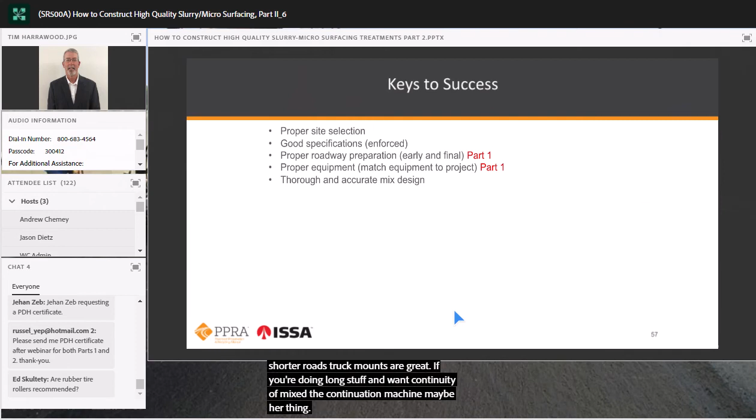You want a thorough and accurate mix design. We talked about that earlier. Without that, you're shooting in the dark. You're leaving yourself vulnerable for potential failure.

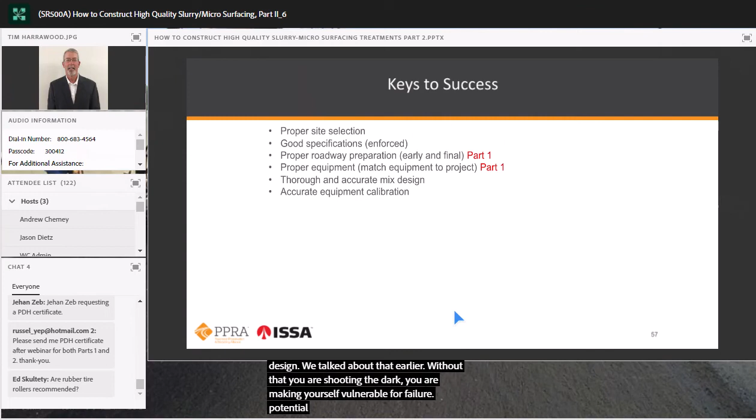You want accurate and thorough equipment calibration. I cannot say enough times how important that is, and how important it is to have agency participation in that. We want good material consistency, and I like to use materials with a history of past performance. I've been around, Jason said 32 years earlier. That makes me a little younger than I am because it's actually bumping 36 years now. I think I need to update my bio.

There are aggregate sources and emulsion sources that I've been using for the entire time I've been in this industry, and I'm very familiar and comfortable with them, and they've got over 3 decades worth of past performance. Very comfortable with those, love to use them when I can, and recommend that.

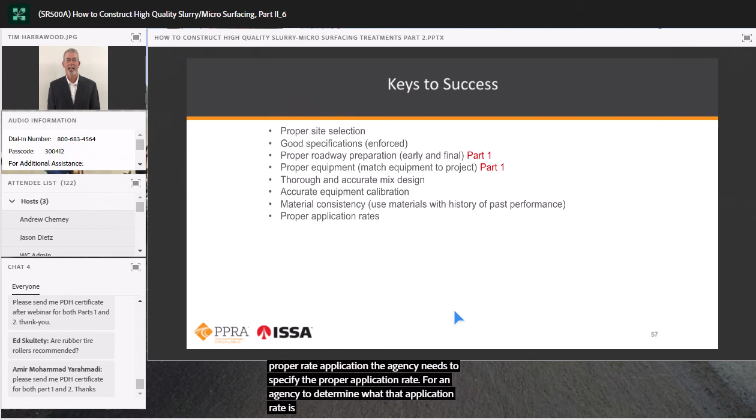Proper application rates. Not only does a contractor need to apply the proper application rate, the agency needs to specify the proper application rate. And for an agency to determine what that application rate is, they really have to rely on history a little bit. If they're kind of new to the industry, they need to do their due diligence, talk to other agencies that have done the work, know about the size of the aggregate, deal with industry, and industry wants these products to perform. So I think they'll lead you in the right way and give you some proper application rates.

You may consider ton and gallon pay items versus square yards. That's the two different ways you can pay for these treatments. With ton and gallon, the agency pays for exactly what was installed, and the contractor gets paid for exactly what he installed. With square yards, the price on bid day is the price you're going to see at the end of the project unless the agency makes changes. But if you've got a tolerance of a couple pounds per square yard, the difference between 18 pounds per square yard and 20 pounds per square yard can definitely have an influence on long-term performance. So when you do ton and gallon, you encourage contractors to use the optimum asphalt contents rather than skinnying things down to the lowest side of the mix design, which can and definitely will have long-term performance issues.

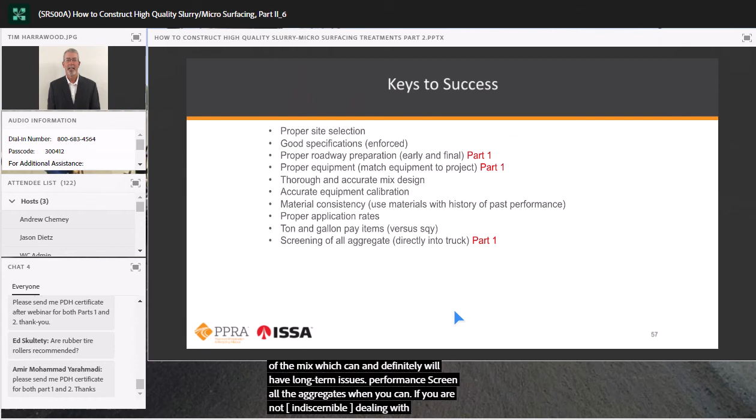Screen all the aggregates when you can. If you're not out west and dealing with dust abatement issues, screen everything directly in the truck. That will eliminate a ton of drag marks, a ton of handwork, and will definitely provide a better product on the road.

Contractor performance - make sure the contractor's got a well-trained workforce that's well-seasoned and with a great reputation. Everything doesn't have to be low bid. It can be lowest and best.

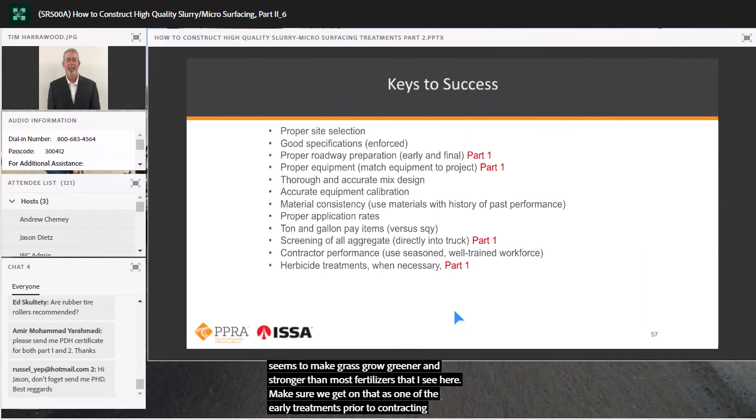Herbicide treatments - use them when necessary. Our emulsified asphalt seems to make grass grow greener and stronger than most fertilizers that I see. So make sure we get on that as one of the early treatments prior to contractor move-in, kill that grass off, let the contractor come in, remove that dead vegetation.

And the chances of it coming back and being prolific are limited. We want quality project inspection. A lot of agencies are here today getting up to speed and becoming more familiar with what we do - I applaud you for that. An agency is willing to help at every turn when it comes to that topic, but we need it. They level the playing field because not all contractors are good at self-policing. And when they're not, that's when we need agencies to step in and make sure the bar remains high on the workmanship and the treatments that are installed.

Public notification - I'll say it again, an informed public is way better to deal with than an uninformed public. Not only from the agency's perspective, but definitely from the contractor's perspective. On our notifications, we put our project manager and project superintendent's phone numbers on it, so those residents can call them directly about scheduling issues or anything that may be of an issue.

That way those concerns can be addressed immediately rather than somebody having to talk to City Hall, 3 or 4 people, then they talk to the contractor, and by the time they get back to the actual resident, they're a little red-faced and hard to deal with. So notifying the public's a big deal.

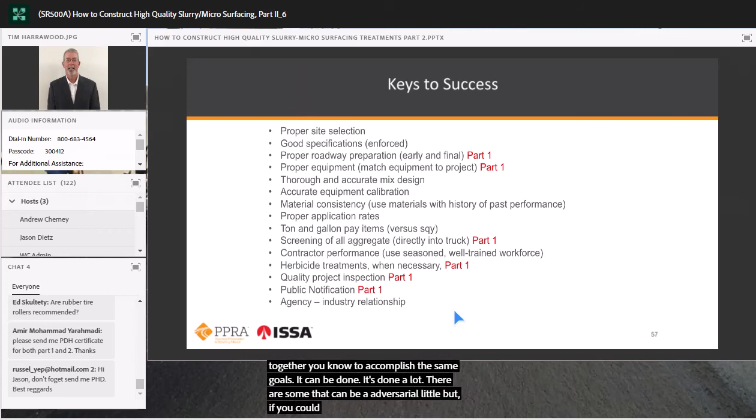And then I love the agency-industry relationship. I use the term partnering, not in the legal sense, but I've found that the best projects we do annually, or for my entire career, have been when the agency and the contractor work together to accomplish the same goals. It can be done, and it's done a lot. There are some that can be a little adversarial, but if you can ever achieve that partnering deal on your projects, I think you'll see the direct result in the quality of the ending project.

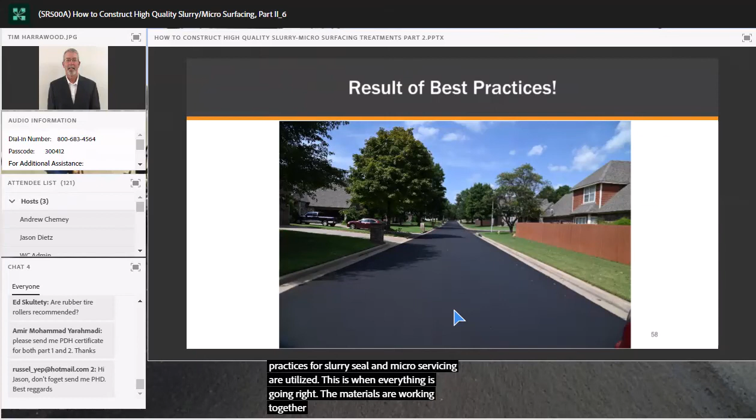So that being said, I'll show you a few pictures of what kind of workmanship you can see when best practices for slurry seal and microsurfacing are utilized. Now this is when everything's going right. The materials are working together, long history of past performance, the crew's great, the equipment's great, the residents were great to deal with. This is what happens when everything is right.

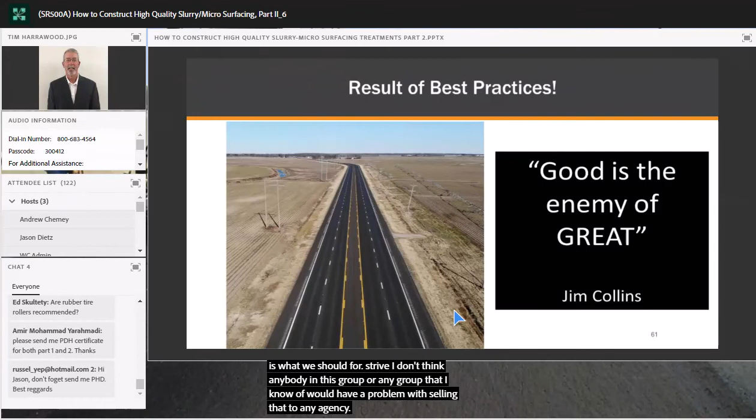And that's what we should strive for. I don't think anybody in this group, or any group that I know of, would have a problem selling that to any agency. And like one of my favorite comments is, good is the enemy of great.

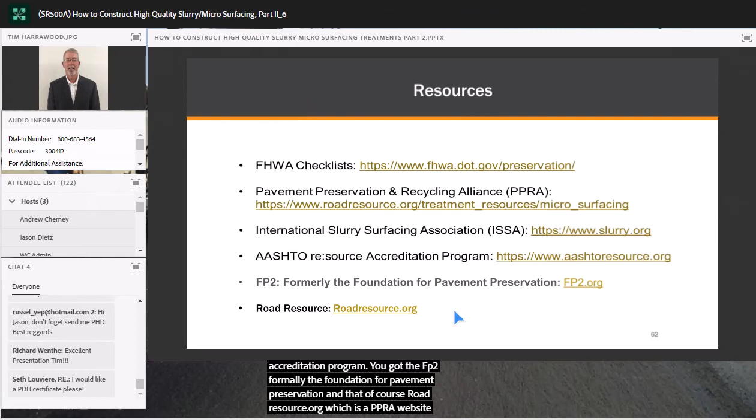And with that, I'll tell you about the resources you can utilize to help you familiarize yourself better with these treatments. Of course, you've got FHWA with their website on preservation. You've got the PPRA, the Pavement Preservation and Recycling Alliance. You've got the International Slurry Surfacing Association, AASHTO's Resource Accreditation Program. You've got FP2, formerly the Foundation for Pavement Preservation, and then of course roadresource.org, which is a PPRA website where you can go learn a little more about managing your pavements.

We talked about free design and inspection manuals. I want to bring this up: government membership to ISSA is free of charge, and any government employee of the entity that signs up can sign up through an employee membership as well. And if they do that, they can contact Allie or Ann, and they can get a copy of that new design and inspection manual and have it at their fingertips at all times.

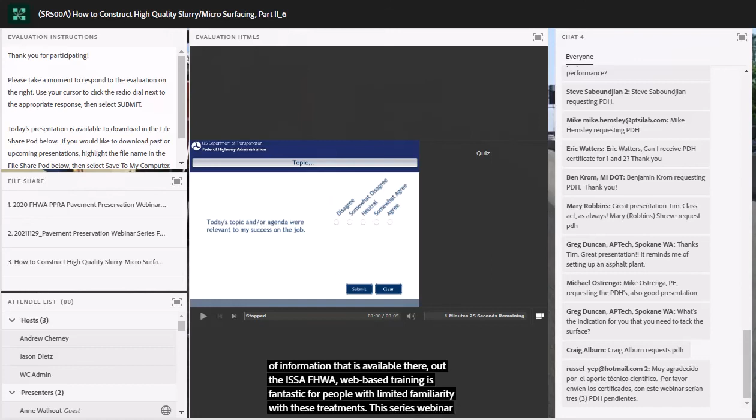This is just a little snippet of information that is available out there. That FHWA ISSA web-based training is fantastic for people with limited familiarity with these treatments. This webinar series, which is going to continue down the line, there's all kinds of information out there, and just be diligent in your efforts and familiarize yourself with it. And when we all are as familiar with these treatments as most agencies and contractors are with hot mix treatments, guess what? We're probably going to have some better successes down the line, or more successes. So familiarize yourself. Anything ISSA or I can do to assist in that...